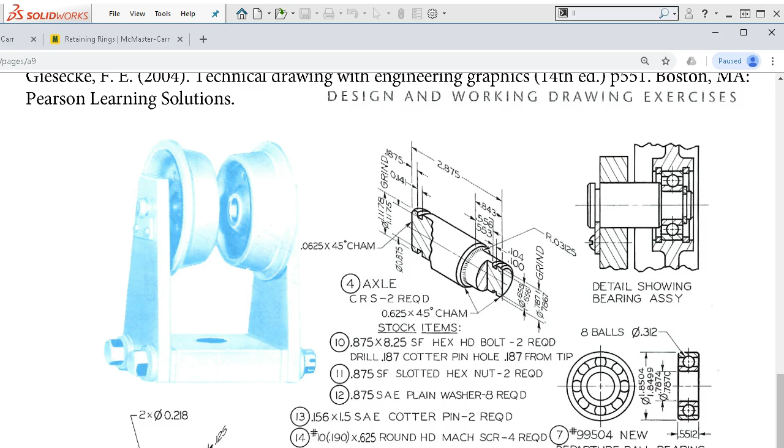Okay, 1353, the trolley, has a couple of purchase components that we'll need to download. I'm going to go into my Windows Explorer, and we have Assignment 9. I'm going to go ahead with a new folder, Assignment 9, and this will be 1353. So we have a folder to save the parts in when we identify them.

Alright, so one of the things we'll need to do is see if these numbers correspond to a metric bearing. Right now, the number 99504 New Departure ball bearing doesn't add up to anything or show anything, so we'll go do a search for ball bearings.

Looking down through the list, we have to decide, well, it's a trolley, it might have some wear. Probably don't want an open bearing. Shielded wouldn't be bad. And then sealed is probably one of the better.

So if we scroll down through here, I'm still kind of looking for that 99. Nice thing about sealed, they're pre-lubricated. They pretty much don't require any maintenance.

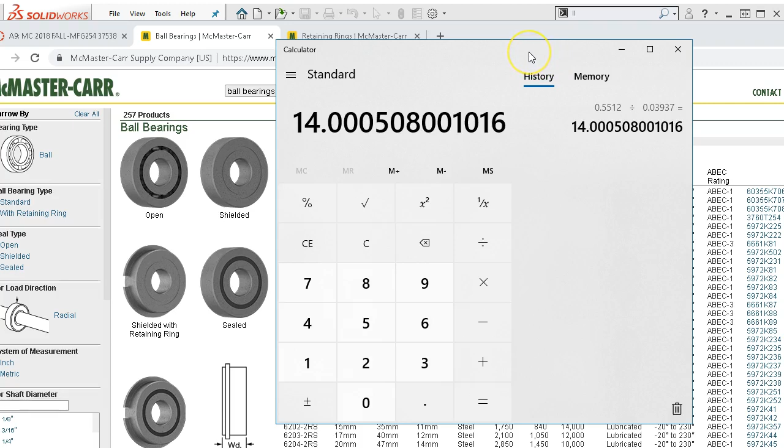So fly that out of the way. We go and we find a 14 millimeter. So 35 millimeters and 62. And I'm going to click on the part number, go to its detail.

So that doesn't bode well. So there is a 47 millimeter, 14 millimeter width. Alright, so it went down too far, so that's looking better.

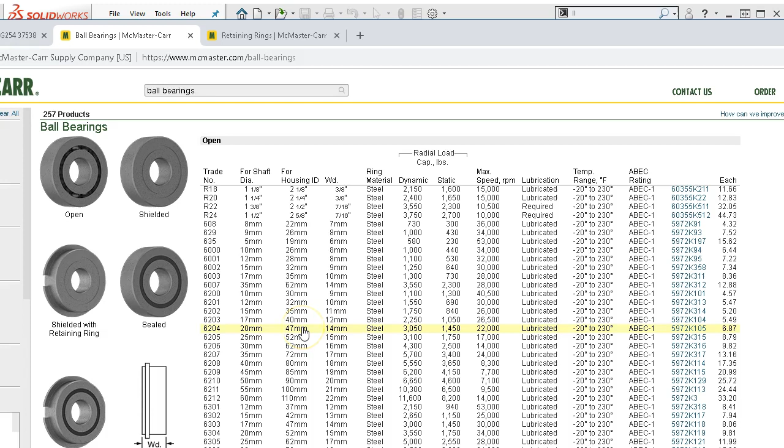And then the shaft diameter of 787 to 74. Alright, so 787.

If we need to update the shaft to 20 millimeters, then we'll see if it fits within the tolerance zone, the 787. Well, we got a little bit of running fit there. Alright, so I'm going to fly that out of the way. Well, let's see, so that takes care of the bearing. So 47 millimeters, 20 millimeter shaft.

The file product detail, and then we're going to save this. And was that a sealed? Seal type was open. And before I get away from that one, let's see if there's also 47, okay, for shielded, and 47 millimeter by 14 millimeter.

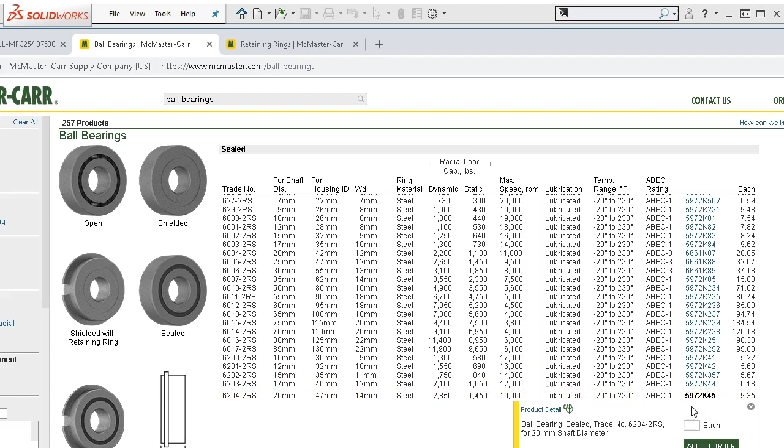Alright, and then we will save that file. That's going to go to my downloads. And then I'm going to jump back over to the Windows Explorer and just put that in my project folder. This was something that we're going to use regularly or had for sizing. Then I might create a folder in the design library for these components.

Right, so the other item that we need then is a couple of axle, we have snap rings. And so I do want to check the design library. O-rings, power transmission, internal.

Snap rings that they're showing don't have the E-clips, the retaining, the holes to help put them in and take them back out. So I think we'll find something comparable and then go in for the fit.

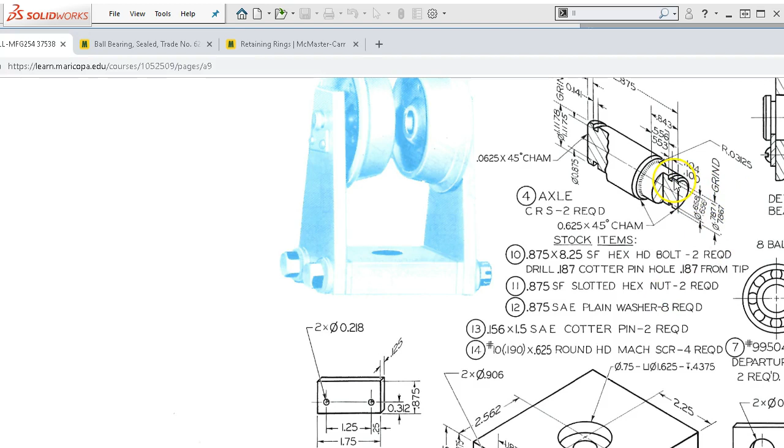Alright, so since we have a basic ANSI, the 656 would probably be clearance for, well, let's double check, because that one's, if that's an external, and depends on which part of the shaft. So, alright, so that one is on the external.

And that goes through. Oh, went too far, so, okay, so on the bearing, and that comes out.

Alright, and the side view, we're looking at the stack up, so it's retaining through the shaft. The shaft comes up to bearing on the shoulder. Oh, and then the outer.

So where is the second retaining ring? So, oh, they're on the internal for the to hold the bearing, and then that holds it up against the face. And then the keeper plate slides up into the slot. Alright, kind of getting that.

Alright, and then the side 7/8, and they're wanting to put a cotter pin. So I'm not sure where that one's going. Maybe through the base. Said to ignore items 7 through 14 on the list. We're going to read through those real quick.

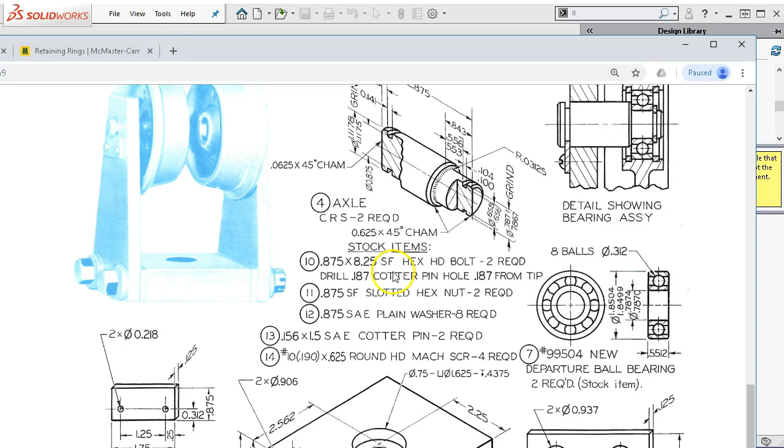That's looking doable. So we have a couple of internal snap rings, and then one external. Let's go ahead and identify the hardware. I don't think I need to download the snap rings.

So we're going to start with the axle, and we'll get this going. The axle is pretty straightforward - a couple of grooves, says that we'll be doing a revolve. The back side of the bearing is going to contact that radius, so I don't know if they're looking to seat that or give it some clearance.

So front plane, sketch. We'll go with our centerline, infinite length, horizontal infinite length. Then L on the keyboard puts me back into the line. I was going to look at the chamfer on the outside. We'll just do this first part to get it established. I don't really have to put in the chamfer.

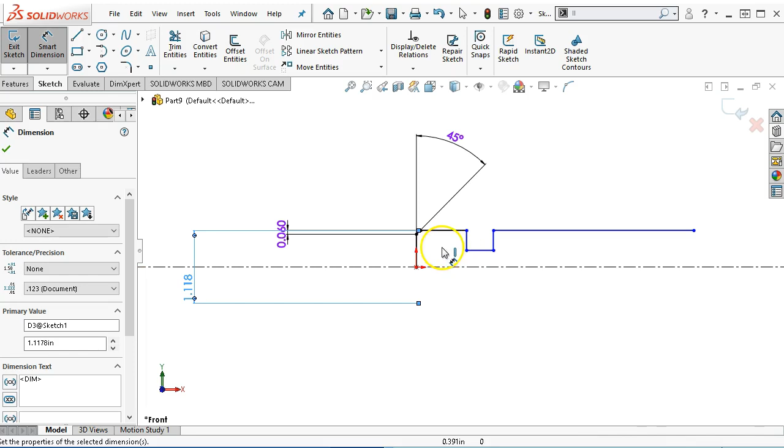That should be right at 30 millimeters if we change this over to metric. Maybe that'll be the task for this, since the geometry and the parts are basically duplicates, one of the things we may go back and do is optimize for metric since these are pretty close to our numbers anyway, and see what we get.

So the inside is 0.875, and we have 0.141 - cancel, because I did not get out of the diametral. So escape, 141. From the edge, ignoring the chamfer, 0.875.

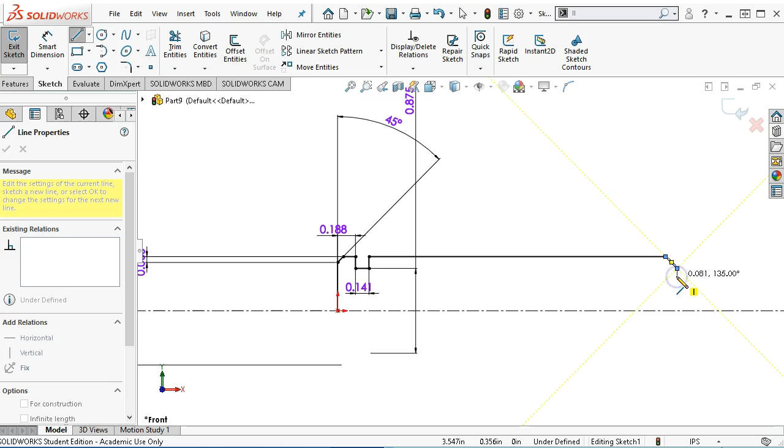We'll set - oh, not equal. Control Z, we want collinear. There we go. And another chamfer - since I'm including them in the sketches, we'll go ahead with that. Don't know if there's going to be a little bit of a flat there or not. We'll see if that plays out.

Alright, so 0.06. I'm not sure what that grabbed, might have been the midpoint. Alright, so 45 degrees. L on the keyboard to get back in line. I think I'll put that radius in last.

Alright, the other snap ring groove or retaining ring groove, and then another chamfer, and then back. In the previous example I didn't close it off, and it asked me, when I completed the revolve, if I wanted to close it off. So we just make it a habit, it's a little easier. 2.875 - okay, so not entirely unexpected that it would do that.

So we can pull these back in pieces and kind of rearrange as we go, as long as it doesn't get too crazy. Based on the way that moved, we're going to do select, control select, and collinear. The geometry then, the 656 to 658.

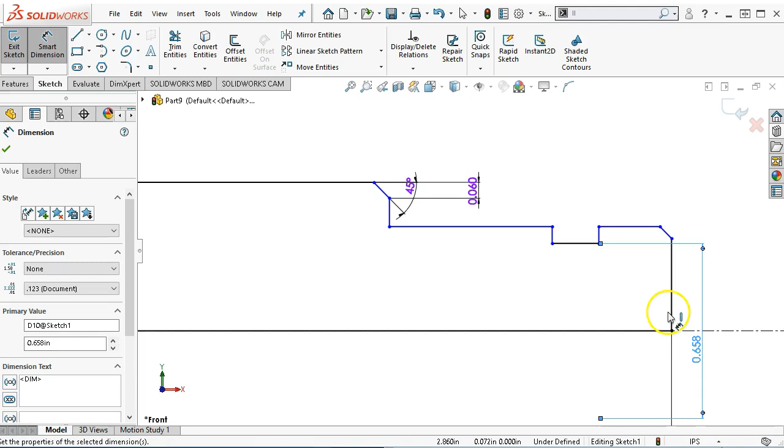So 0.658, and then the outside was 7871, 0.7871. Alright, same thing - oh, we're on the centerline, so go ahead and bring this out. 0.06. And either picked up a parallel or a perpendicular to something.

Alright, and then the maximum material 100 to 104, so we'll go with the 0.1. And then the distance is 0.556 to 553, so 0.556.

Alright, so let's see what's able to move and why. Overall, then the dimension that I'm missing is the 0.843. Okay, so that gets it fully defined. So the radius of 0.03, and features revolve.

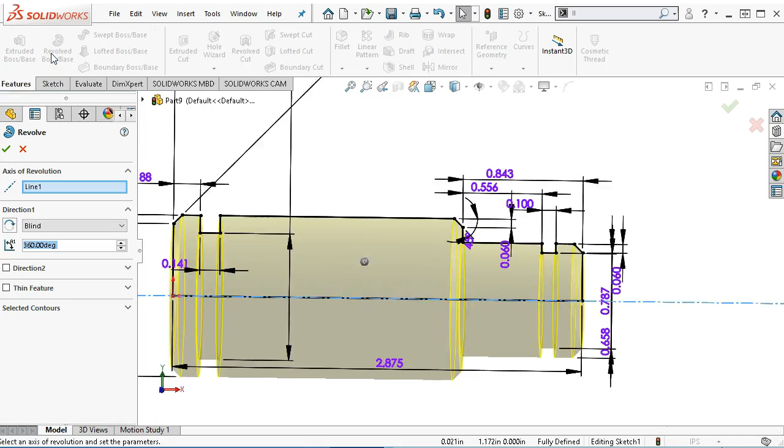Alright, so coming back into the edge, internal face, we'll go for 0.03, and then we're ready to save. Alright, so this is item 4, the axle.

Alright, the keeper should be fairly straightforward - 1.75, 1.25, which is clearance for the 1032s. So that'll be a sketch on the front plane. We want to take advantage of that symmetry, so just a rectangle out in space, hold down the control button, we'll go to the midpoint, width is 1.75.

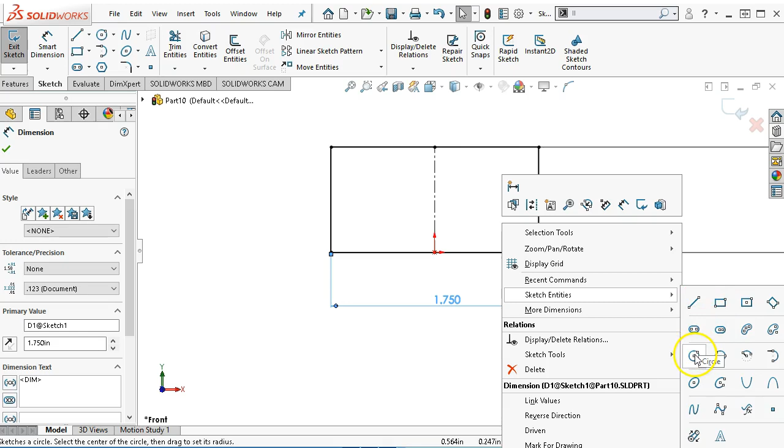Since there isn't any additional geometry, we'll do this in one sketch. If we go line and use it for construction, then we can use the symmetry. Let's see, sketch tools - selection, nope, sketch entities. Alright, so we can find a circle down in there - I don't often use that one, just wanted to point it out. And we're going to mirror those over.

And 5/16 from the edge, 312. And 0.25, or 1.25 on center, and 7/32. Okay, so 1.25, and we got an extra couple of digits in there, so we'll just overwrite 218, and then our thickness, 1/8 of an inch. And features extrude, 0.125. So this is item 6, the keeper plate.

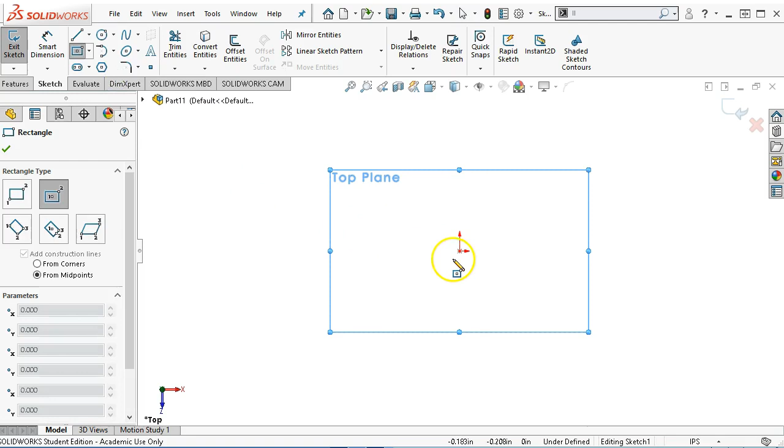Part edge. Let's go into the top plane and kind of looking towards the assembly. I would really like this to be at the center. See if it'll let me change it. Oh yeah, let me change it, but I lost my point, so we'll drag that back.

Corners and midpoints, kind of a personal preference. So we'll go 4.5 and then 5.125. And then I'll extrude that out to a distance of 1.75.

Okay, and then the through holes, we maybe could change those over to threaded holes, and it wouldn't necessarily have to go all the way through the 5.125. So in that case, if there's a possibility, we're going to do the hole wizard.

906 should be just above 7/8. So all drill sizes, let's show the decimal values. And then 906, 29/32nds. And then the end condition is up to next.

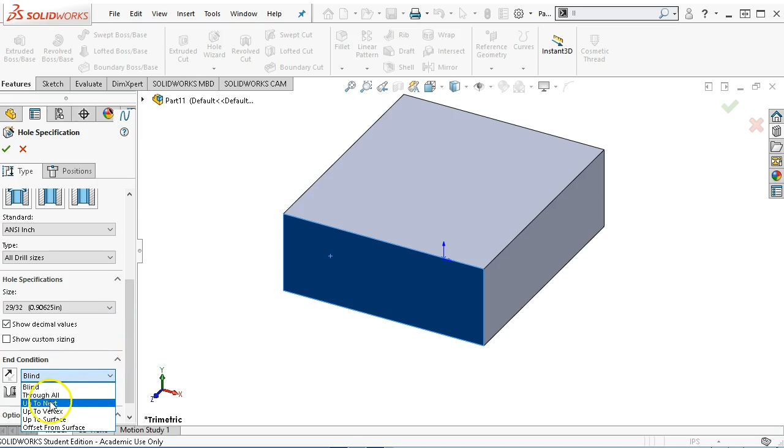Go back to the positions. And I want to use the symmetry, so we'll go with line, and for construction, select Control Select for the mirror of the entities.

And we're given a positional between the two, 2375 to 2372. So in this case, we have a 3/1000 variation, and I want to say that for position, we should be considering a mean value, so 735, and then we'll see how it plays out with our tolerance.

Alright, so this is going to be a limit dimension plus or minus 1.5 thou. And then the decimals, we'll go ahead and put it at 4 decimal places.

So I was looking for 372, and still had one too many zeros. So tab, let it update. Alright, so 372, 375, mean value for the position.

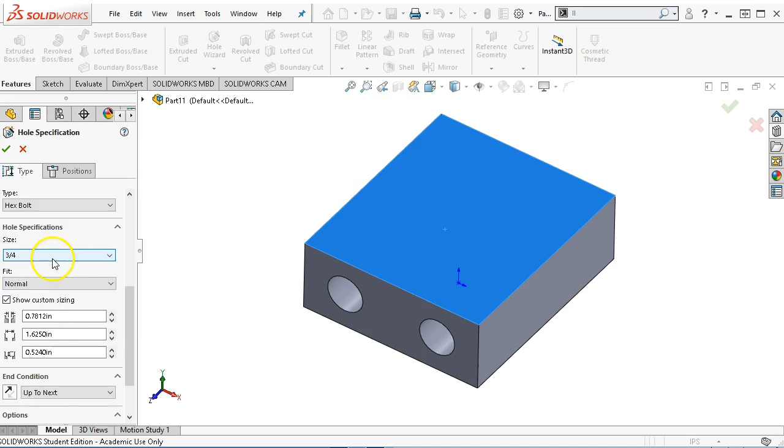And let's see what it looks like normal, show the custom sizing. So we're at 781. It makes me think it's going to be a 5/8 11 again, so let's go down to a 5/8. And then we're at 0.65 and loose 0.6719.

Depth-wise, we're pretty darn close. Alright, so in this case, we're going to make an adjustment. Just be aware that when you override these values,

that you're responsible for making sure that the fastener is up to the standard. All right, and then position is at the center of the block, conveniently enough. Place it and accept it.

All right, so ready to save, and then this was item 3, the crosshead.

All right. Looking at item 5, the adjusting shim. Very similar to the keeper plate. So rather than redraw all of that geometry, I'm going to open up the keeper plate.

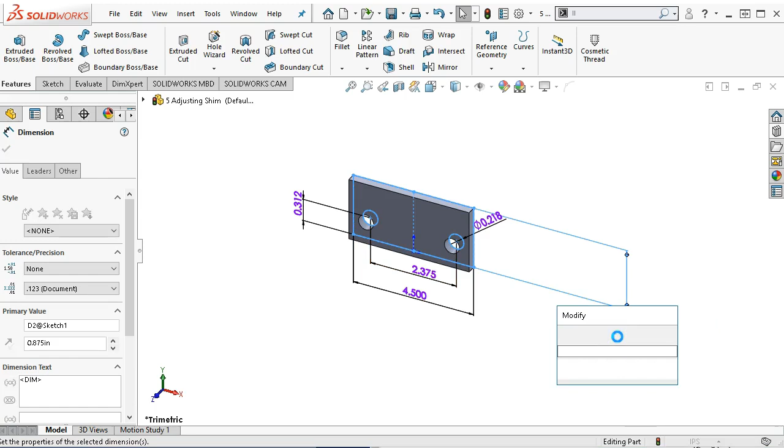Alright, so in this case, I'm going to go ahead and put in the 0.875 rather than tying it to the center line. Hole size is 15/16, 0.937. And then we go to rebuild.

That makes this the larger plate. And then it is also 125. So we go ahead and save it. And then we have that piece in the mix.

Alright, so the tumble to remove burrs, hot rolled steel, so a 1018 10 series. And then tumble to remove burrs. Well, we'll just remove the burrs.

Okay, so then close that one up. We're going to the side plate then. And then that one is still open, so file new. Part inch. And we'll sketch on the front plane.

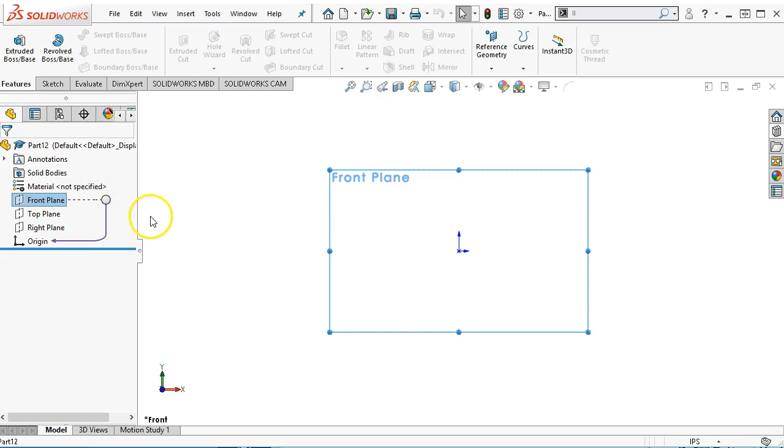And we still have symmetry. So pretty much the same as what we built. So I'm thinking with a corner rectangle, since the base kind of has that initial step up, we'll do the midpoint. It's 4.5 wide. The first step is 1.875.

And to switch that to construction geometry, so when it comes up, I'm going to go to center line from the pull down, or do line and change it, so that becomes vertical. The overall height then is

9.25. And the width at the top, 1.875.

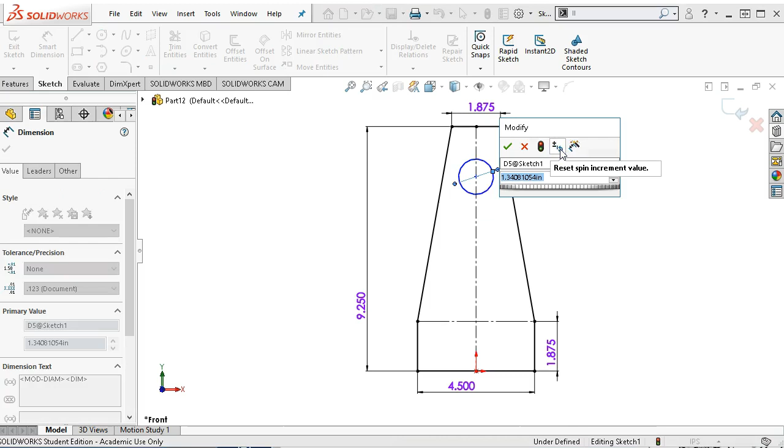Alright, and then we have the holes. So again, maximum material condition is 1.116.

And from the base, now we need the other 2 holes. So that's going to be 1 inch. Did not click to complete.

Alright, so we will set those to the mirror. And those were, well, they weren't called out 3 times. Oh, there we go. 2 times 0.875.

And they are 1 inch from the base. So, considering the others were 875, that gives us a little bit of a gap.

And then the distance is going to be the same as the block, and since that was the tight tolerance, 2.3735.

Bilateral dimension, 0.0015. Boy, I sure like that third zero. Okay, half a thou, no.

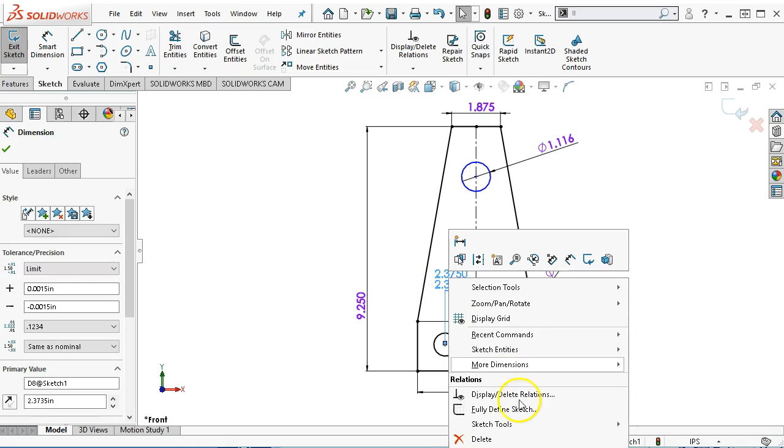And I don't think I did this one on the other one. We can mark for drawing. That one in place. And then in relation, between the holes is 7 inches.

Okay, so we have the 10-32s for the plate. We're going to extrude this out, and it has a depth of 0.75.

And then S key, hole wizard, tapped hole. Reset the custom sizing to what we're doing currently. And then we're going to go to a number 10-32, 10-24.

And up to next. So positions. So we'll stay with the center line. I would just as soon use the mirror and the symmetry than do the stack up of dimensions where there's a possibility of making a mistake. So 1.25.

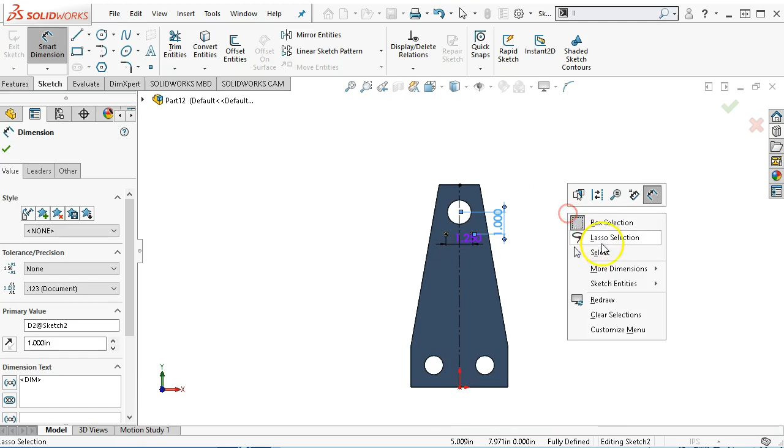And then from the hole center to the point, 1 inch. And we'll go ahead and accept. And then we're going to do save.

Is number 2, the side plate. Alright. So then that's going to leave the trolley wheel. Just a quick double check of my numbers.

So not geometry. Alright, so 1/2 inch bore, 3 holes equally spaced.

Alright, and then we're looking at this profile, so that's going to have some complexity. We're not concerned with the holes, but the retaining rings. And we've already sketched in for those, so I think I'm going to try those with the retaining ring tool, just to illustrate that.

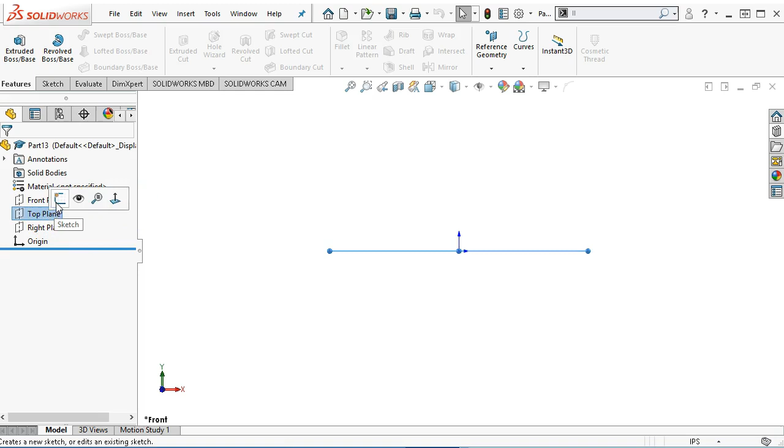So I'll fly out the number 1 trolley wheel. All right. And then on the top plane, looking at that profile, go with the center line, vertical, infinite length, onto the origin.

Don't really care which side of the hub is going to be for the geometry, so I'll start sketching this out, apply that back in. So I've got kind of this segment.

We're going to do the retaining rings with the groove tool. So that comes out. Saw that there was, okay, the profile, 375 on the height.

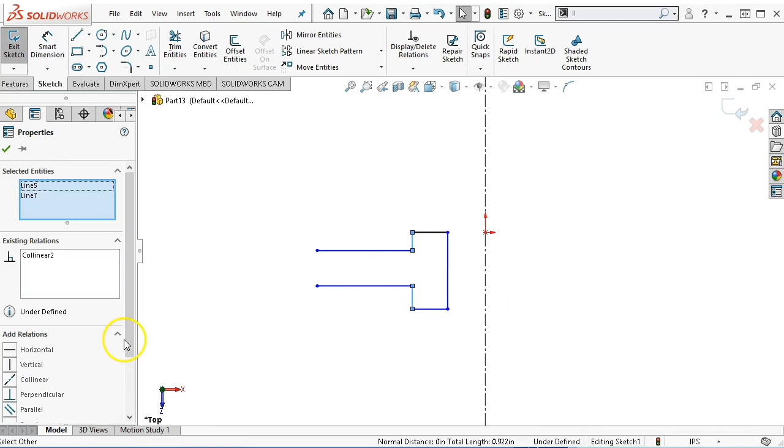So we can make those two items collinear and then come back and make them equal. And we'll go 0.375 and 0.375.

Okay, for the diameter, all right, maximum material condition for our first number, we have the 1.8504 and the 1.8498. So 1.8498. Smaller number is my maximum material condition.

2.5 to the hub, that's the one I'm looking for. So the outside, 2.5. All right, and then we're going to need some more geometry.

So the wheel falling away, we're going to put the radiuses in at the last. And that doesn't look too bad. We'll be able to go all the way around.

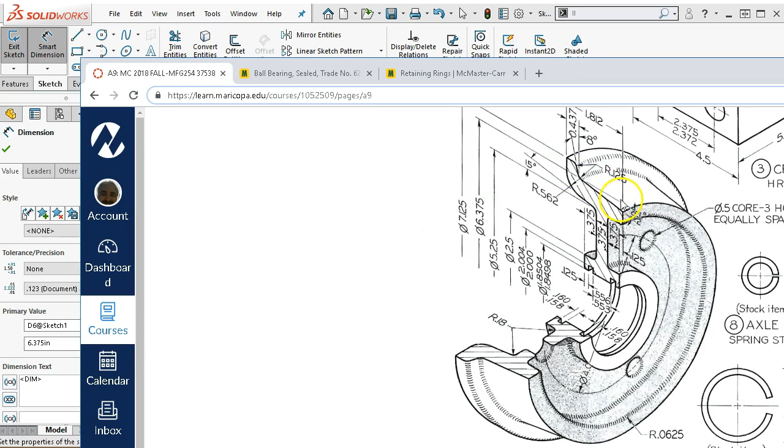Alright, those should be on the same plane, and then we can start working with some collinear, and then we can start working with the heights.

Alright, so the overall height, 1.812. So 1 13/16.

Alright, so it inverted itself a little bit, we're going to pull that back. Let's see what we have for a step. If that comes up even on the face, no, it's telling me that we have about 1/8 of an inch difference.

Okay, so let's fly, so let's make sure where I saw that. So the outside edge, 1/8 of an inch, and then that goes to the hub.

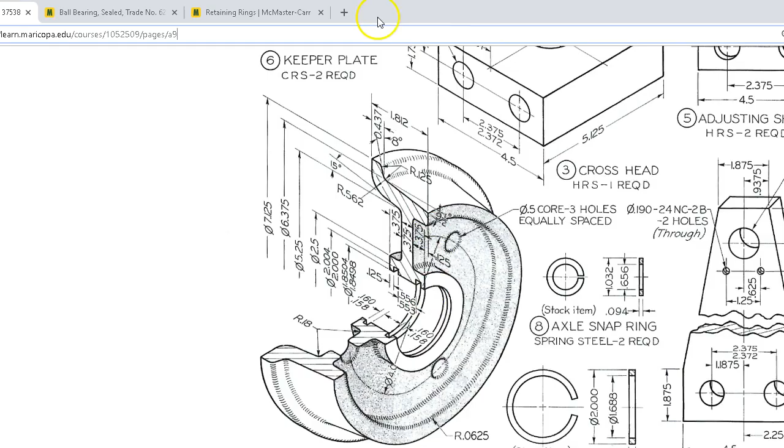Okay, so kind of a small amount, 125. All right, and then the outside step, 0.437, 7/16.

All right, and then there's a radius, 0.562, so let's go ahead and put it in as a fillet on the interior edge. All right, so the rest are going to be pretty much consistent.

So they gave it a 15 degree. Let's see where that is coming off of. So if that comes off tangent to the arc, well then I'm going to need the arc. And looks like it's coming off of that tangency point.

Well, let's see what that does to the dimension. Alright, so let's get out of the fillet, and then I'm going to take the vertical off, because it has that parallel dimension, I'm not going to be able to use that.

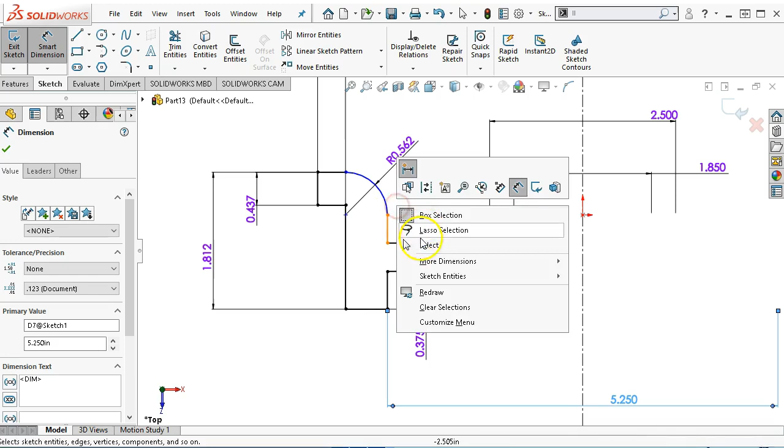And those can't be collinear. Alright, so let's get the dimension back in before we start making adjustments for that 15 degree. Alright, so starting point.

And let's see, that interior radius was 0.18. Okay. And we're not given the dimension to the center of the radius.

So the 15 just kind of back a little bit. And then since that dimension pulls, thinking it's going to be at the radius, so we'll make it coincident. And then 15 degrees off of my vertical, so might as well go back to the center line.

Alright, so that kind of jumped out there a little bit, but that gives me the geometry. Let's see, with the wheels, sometimes we're looking at the crown. It keeps expanding out on me, so there we go.

No crown, 9.5 degrees coming back to the face. All right, so that's interesting. So 6.375, and that looks like at the bottom of the radius. So those were 1.25s.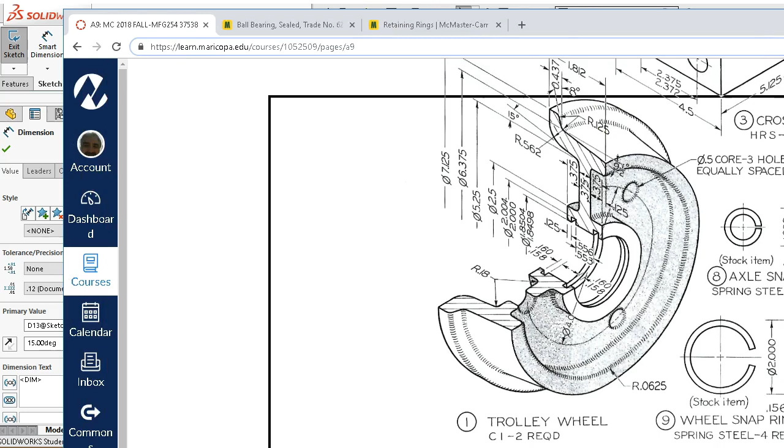All right, so that one we take the vertical off of, and there again the dimension is driving it, so we have to take that one off. All right, I'm going to put the fillet in at 0.125. So I'm not exactly fond of the way that these are dimensioned, but can't do a whole lot about it.

All right, so 9.5 degrees from. Need to pull that just a little bit off so we get the angle started. Now we'll be able to pick that outside edge and the line, and that'll give us the 9.5 degrees.

All right, so near as I can tell, 6.375 is out here, and it's at the bottom of the radius, and then the radius blends up and in. So that being the case, move that out of the way, find our dimension.

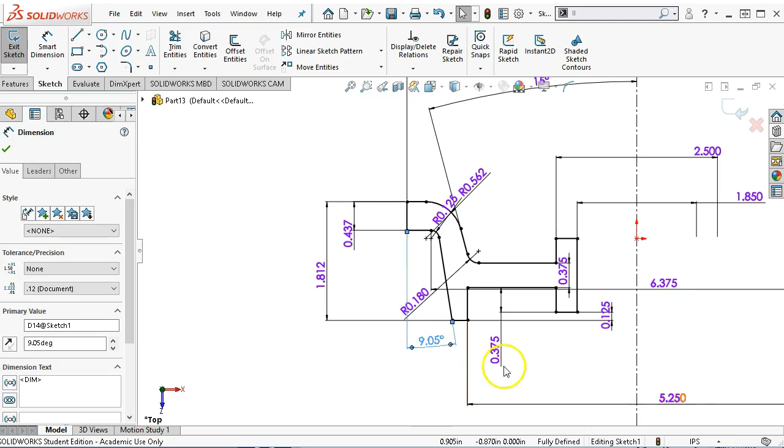And bring it in. Oh, and I put a 0.5, I guess so, 9.5. Got an extra 0 in there. Alright, so that's quite a bit different.

It's kind of hard to tell what's going on in with that angle. Oh, and then they got me for another 8 degrees coming off of that angle. So back to that point for the 0.437. Wow.

So that being the case, take the 0.437 out. We're going to take the horizontal off. Right, so identifying these geometries. Right, so that's letting it go.

The 0.437 is to the bottom of the radius. Again, that's from the visual.

And then we have the non-parallel lines, so we can go to 8 degrees. And all of a sudden this became a little more complicated.

Alright, so we'll fly this in one more time and see if I missed any more dimensions. So overall, 437 intersecting at the radius, and then 9.5 degrees, 8 degrees off of the back.

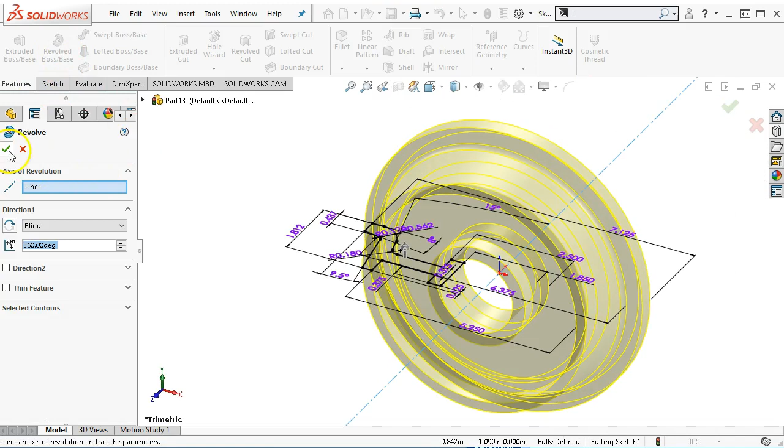Alright, so interesting trolley wheel, let's go ahead and revolve. Alright, so it ended up not exactly like the drawing, but that's okay, we have good geometry, I'm not going to worry about changing it.

All right, so opening up a sketch on the inside face. Let's go ahead and generate the base circle. So 4-inch base circle for construction.

Pick a quadrant and dimension of 0.5. I'm going to set that one to vertical. No, I should have put the 4-inch in.

Okay, so now we can go into our circular pattern, and we're going to have 3.

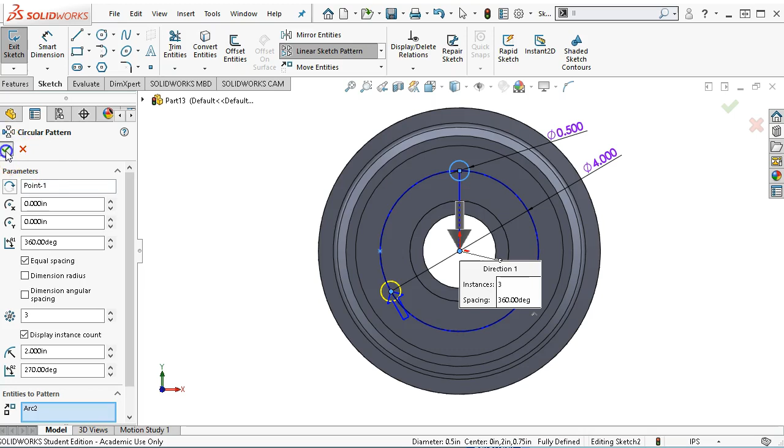Alright, so once again, I'm looking for the point. Nope, it did something there. I know it's there. Alright, so if this was a Hole Wizard item, that would be counted in the instances. Since I was able to drag it back to the origin and get it to go fully defined, I'm inclined to leave it.

And we'll extrude cut and tell it to go up to next. Alright, so we have enough into this one. Well, we have way more than enough into this one to save it. And we'll set the trolley wheel.

Alright, so I'm not ready for the rest of the fillets just yet. So we have the inside geometry. And if we go to, let's see, right-clicking and going to the SolidWorks add-ins.

I want to say that I saw it, but I'm not sure where. So I may have to go back to the standby. So there is the SolidWorks toolbox, and that is all of the fasteners. There's also under tools.

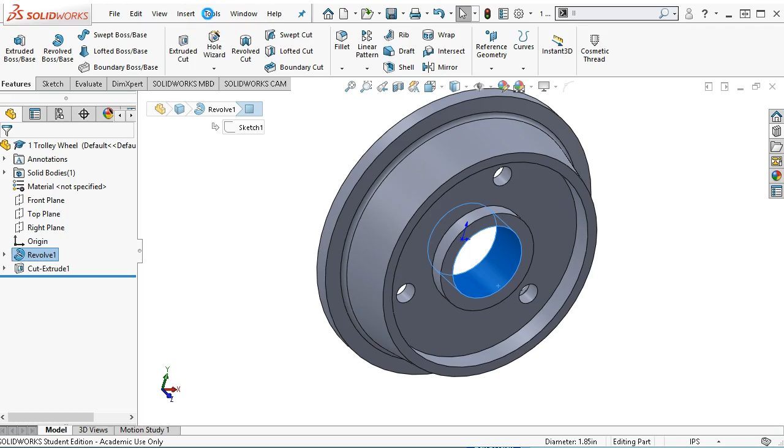Okay, if it's not crashing on me right now. Come on, you can do it. Okay, it was just waiting for me to pause the video.

So, tools, toolbox, where we went before. Now you have the structural steels, which are the I-beams, the grooves, the cams, beam calculator, and bearing calculator for life expectancy of the bearing. So groove - we're going to pick up for the retaining ring.

And we'll give it a chance to catch up. We'll let it pause while it's catching up. Okay, so O-ring grooves and retaining ring grooves.

So this is an ANSI inch. It is an internal ring. And actually, seeing how we're pretty close to the metric sizes, and we're going to switch to metric anyway, I'm going to do a basic internal. And then we're looking for that.

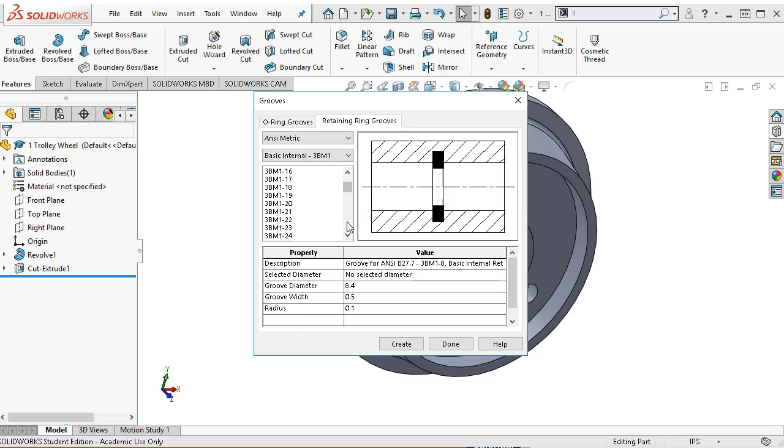What did we end up with? 2-inch. So actually it probably should be pretty close to a 50 millimeter. Alright, so we'll see what that gives me. The groove diameter, selected diameter.

Alright, so I have the inside face selected. I had the inside face selected. And it jumped over to 47 as a default. So 49.8, that looks pretty close. And we'll go ahead and create it. And we can always make adjustments to the sketch once we determine how close we are.

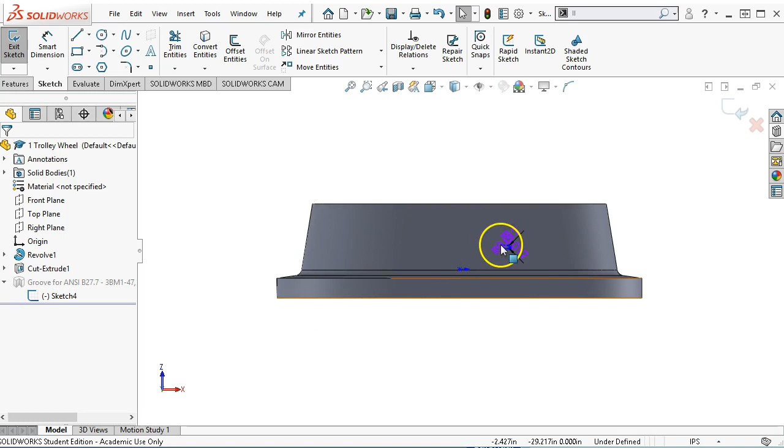So done. And then the groove, expand it out. We're going to edit the sketch. Alright, so we still need center line. For this, we're not going to need it to be infinite length, so we just need to do the revolve cut.

Alright, so the width that we're given is 0.125. And that was quite a bit smaller. Alright, so we're probably going to have to dissolve this sketch because I don't know that those numbers are going to line up.

So pretty close. So maximum material would be the 2-inch. The depth is going to be to the wall. Right, so I can just drag that over.

And we didn't get - let's make sure we get some verticals in there. Vertical, horizontal, horizontal. Alright.

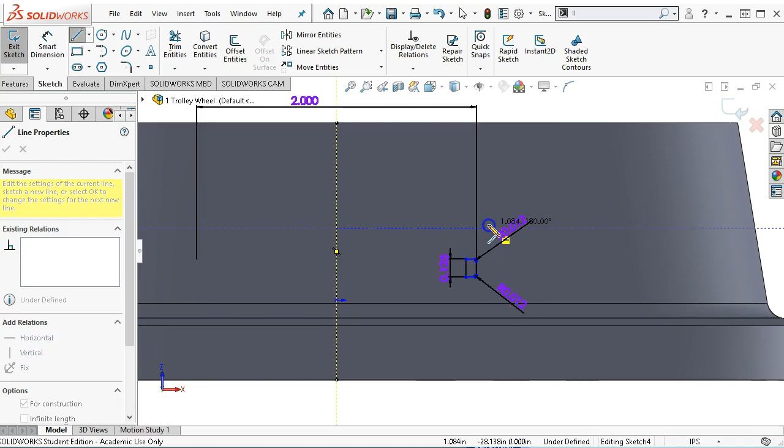So I'm going to go ahead with the second center line. Well, let's put it back in shaded with edges. And we'll just come out some distance. I need to grab my geometry and then control select. I'm going to mirror that over.

Alright, so that's going to give me the depths. Now, once again, we're on the interior, so this was 553 to 556. That falls into the category of the positional again.

Our bearing is 551, so that's a consideration - we have a couple of thousandths of clearance for the bearing to sit in there. Alright, so I'm just kind of cleaning up on that, and then we have an 1/8 inch off the wall, so we'll jump back into the hidden lines removed.

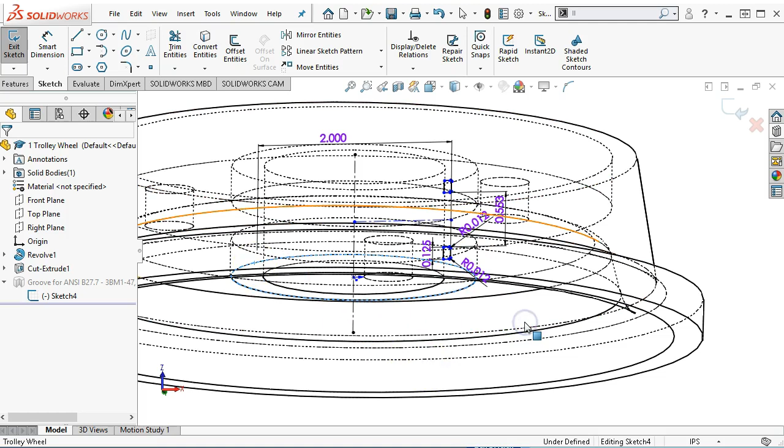And then the lower edge, okay, back to - okay, control 5 didn't work, control 6. Alright, so just kind of verifying that on the step we're up, over, and back. And we'll zoom up on that.

So 0.125. What was the groove size? So, nope, groove size actually was a little bit bigger, 160 to 158. So, oops, we can catch up to that, 158. And then our dimension is still 553.

Alright, so that looks pretty good. We can go ahead and accept. And that gives us the groove. But I'm not sure that that specification is what we need it to be. Alright, so it's still showing me an underdefined condition.

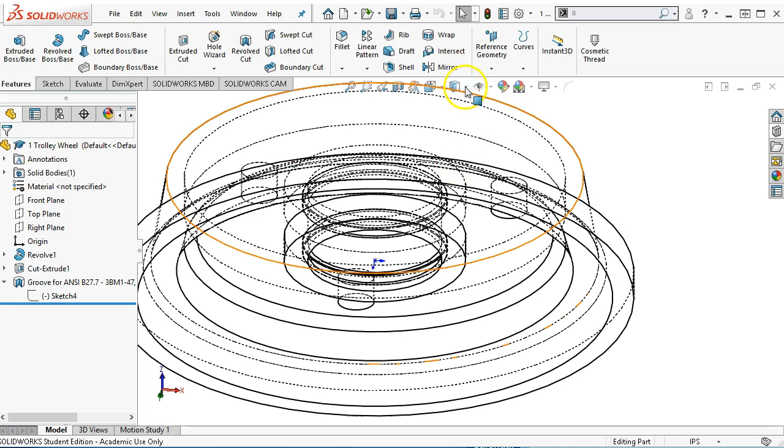I'm getting all kinds of fun stuff there with the view. Alright, make sure I know what I'm picking, get back into the shaded with edges. Alright, so that all looks pretty good. So if I right click - just wanted to check on the groove description.

All right, so let's pick that up. The 069, so that would be about 1.75 on the groove width in millimeters. So we have it in there. And then let's go ahead and save. And our radiuses are 1/8 of an inch on the outside.

Looks like a sharp edge on the corner. The interiors, don't really see anything. Well, we have the 0.18, so that would probably be typical. And 0.0625 on the outside. So we got a little bit of everything there.

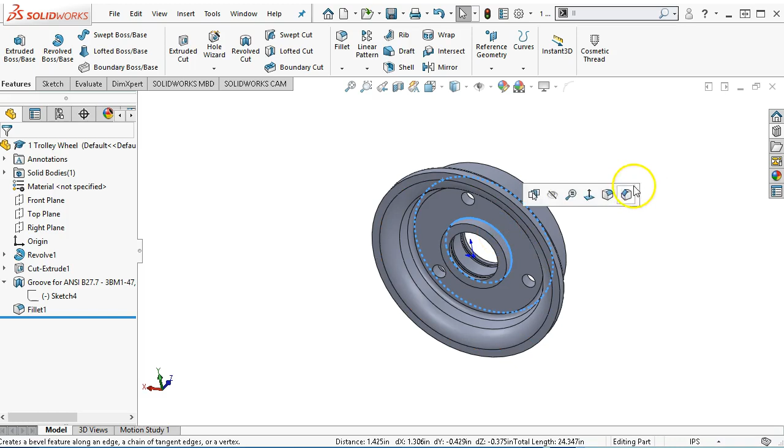So let's start with 0.125 and accept it. And then the outside of the wheel is the sharp. Okay, and we already built the 0.18 into the inside to get the angles.

Okay, so that's looking pretty good. Let's see, it looks like we missed one there. So that was the inside, the outside. Alright, and then we'll go one more. 0.06.

Alright, so let's take a look at what it does in section. And would really rather have the top plane. Well, let's go to the top plane. And rotate over and see if we can get pretty close and compare geometry.

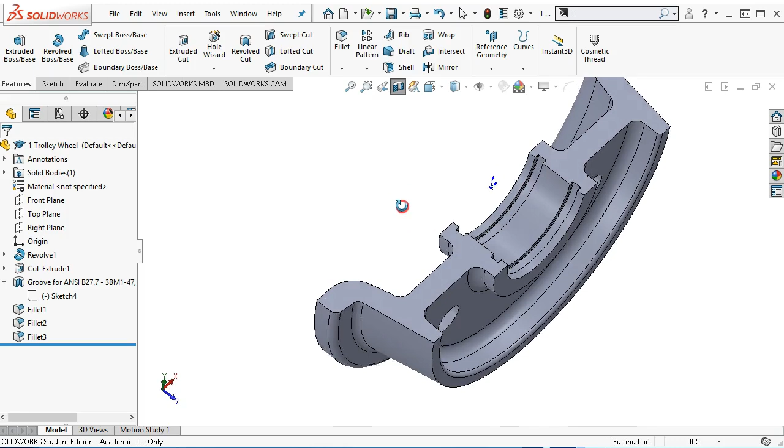Alright, so my half-inch core hole doesn't intersect through that plane, but the rest of the geometry looks pretty close. Not seeing anything terribly missing, so we will call that one good.

Alright, so clicking on that. Let's go back into sketch 4 just real quick since it's still got the minus sign. Would like to see. Put a center line up here for me. And not sure why that groove or why that origin is so far out.

I ended up drawing one, and I don't really want to delete that one. Well, let's see what happens if I delete it. Alright, so everything was tied back to the original, so, okay. Maybe that wasn't a good thing. Alright, so let's see if we can undo it.

Alright, so their center line geometry is the one they want to keep. So I'm just going to connect it. And I saw that briefly flash up. Alright, so it's still underdefined.

And make sure it goes vertical. And now we have a fully defined sketch. So most of the time the center lines won't affect it, but in this case it did. Alright, so we'll save. Good.

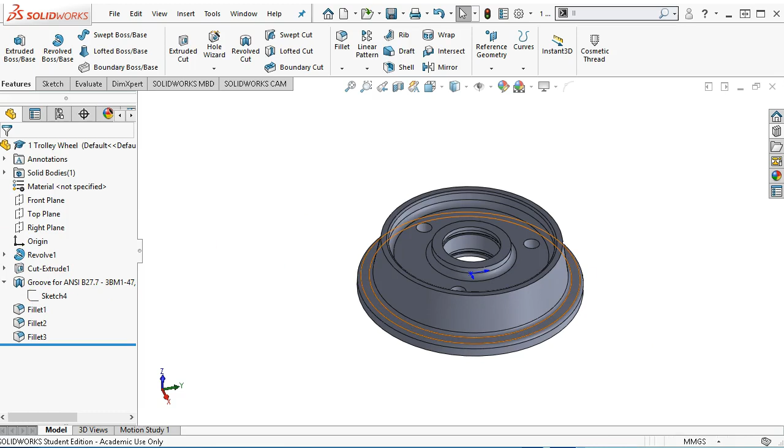Alright, so here's where it gets interesting. We drew in inches. We made the one adjustment for the ring. And if I switch over to millimeters, grams, and seconds, then when we go back into that sketch, we're going to see everything in millimeters.

All right, so making the conversion, jumping over to millimeters, we're going to lose a little bit and gain a little bit on some of the numbers. All right, the ones that I don't want to mess with, this internal, right, because that was the 447, and then the 63.5, we can leave those.

All right, staying with the 3/8. Well, that could go up to, if we thin out the web, no, I think we just need to leave those two alone. And then I don't want to shift the position there. I think we're okay. So we're just going to make a few decisions on the overall.

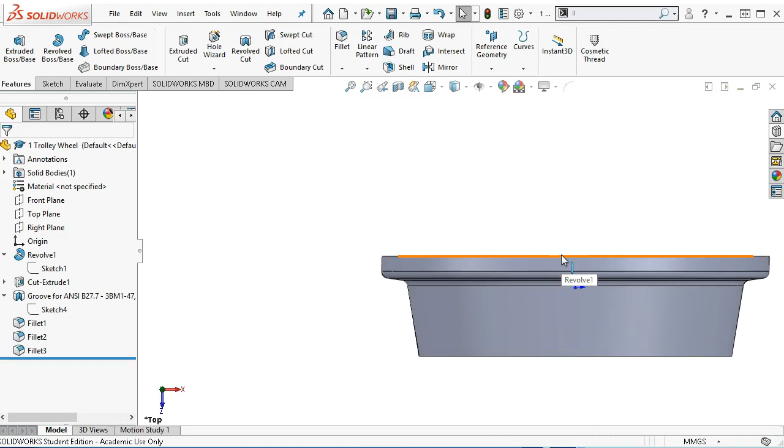So 181. And that's the basic. When you see the instructions to convert to metric, that's pretty much all we're trying to do is what makes sense - if I see 4 decimal places or 3 decimal places on a metric number, do I really need those? So let's go ahead and save.

I think that's the components. So we'll set for the new assembly. I'm going to browse to the, item 3 will be the first item in. And again, accepting it because it is in position. I don't have to flip the orientation, just going to the check mark puts it origin to origin.

Advantages and disadvantages of our inch to metric conversion, and I only did one part. We can certainly go through the rest.

And the question is, do I want to bring in individual components or have the mirror, since this is going to be a pretty decent sized stack up. So for this one, we'll do a mirror, and then we'll see if there's any issues with setting it up that way.

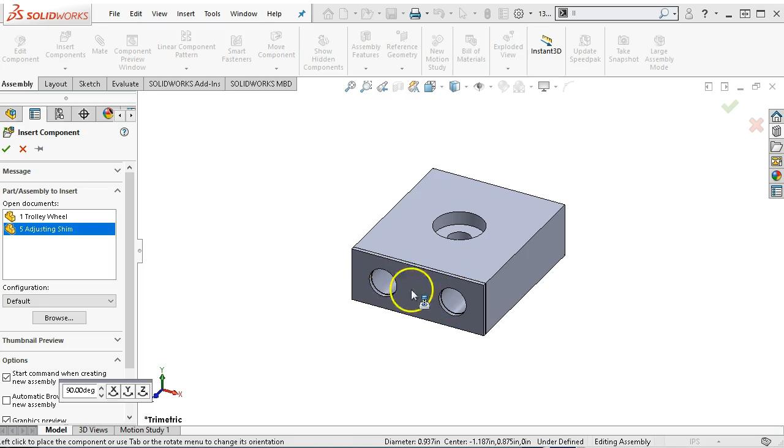Since it's open, I will insert components, and I'll grab the adjusting shim, and now whatever cylinder that I hover over, it's going to try and make it concentric. Right, it also made the edge coincident. Right, so that little bit of mate reference is going to let me be a little more efficient dragging it in and getting it set up. And then we can go concentric.

All right, so apparently on my numbers, add this mate and break. And then there are misaligned options, which it's interesting that came up. So if we use the misalignment options, it's going to allow it to stay in place even though we're probably not more than a half thou off. But notice that the concentric picks up that extra symbol.

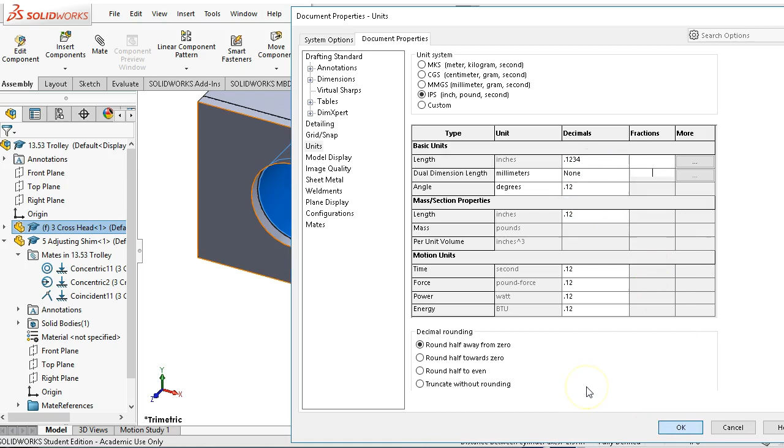Alright, so since those weren't as critical, it was position, and the hole is enough larger that positionally it will float into place. So that's where the misalignment's coming in. Alright, so if I'd gone to 2.375, then the plates, the outside piece, yeah, really it's the side plate that has the same dimension. So positionally 906. So I don't think really the 3/1000ths.

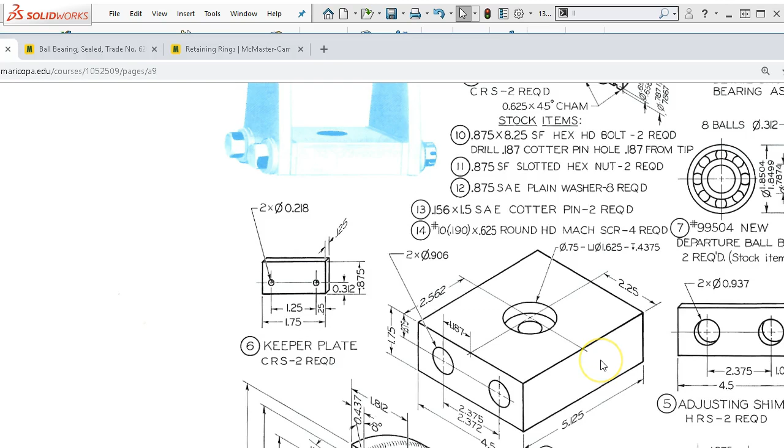That holds it a little tighter than a nominal dimension, but I think probably just leaving it to the 2.375 will line all those up, because an 875 hex head bolt, so a 7/8 bolt going through there, is going to be fairly tight through the outside, pretty well loose on the adjusting shim, and then a little tighter but fairly loose on the through. So that stack up is probably something that needs to be re-examined.

But we'll leave it off alignment or misaligned, and then we're going to insert for the side plate.

All right, and didn't set a mate reference for this, so we're going to bring it up coincident. And then because these numbers, move it a little bit closer, these numbers should line up with the tolerances.

Then I'll have concentric. And one of the reasons that I do concentric to concentric is exactly for that reason. If there is a misalignment, if there's something that doesn't stack up, then it's going to bark at it. And I want to say it was 2017 when they added the misalignment, allowing it to go ahead without having to go back and correct it.

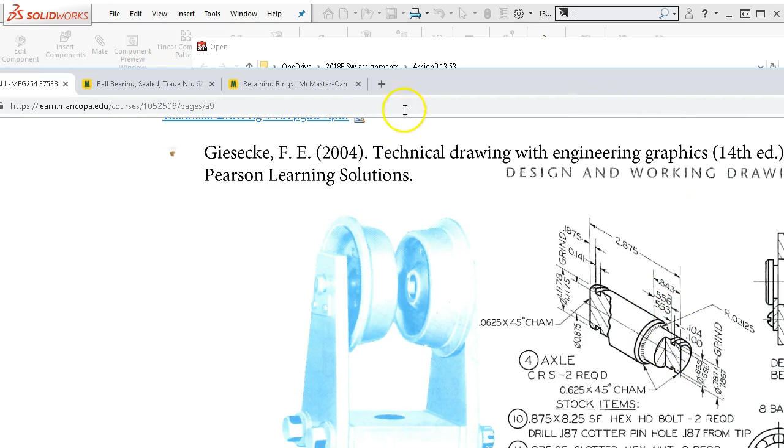Alright, so insert. I'm going to bring in our first item. Was the item for the axle. And then we can go back and look at the keeper plate.

Alright, so same thing, we'll line that up. Go in concentric.

Alright, in the face. Alright, and I also realize that I'm cruising through these mates fairly quick. At this point, you should be getting used to the mates and the coincidence. And I want you to be able to see something that is closer to real time. Right? That you can expect that once we get into the rhythm and the workflow of these projects, that it will go a little quicker.

All right, so I'm staying in insert component. We'll bring in the keeper plate. All right, same thing. I didn't set a mate reference. If I had, it would be even a little faster, so coincident. Since I can see this geometry, we're going to go in. I'm still trying to go face to face, so get used to zooming in. And concentric.

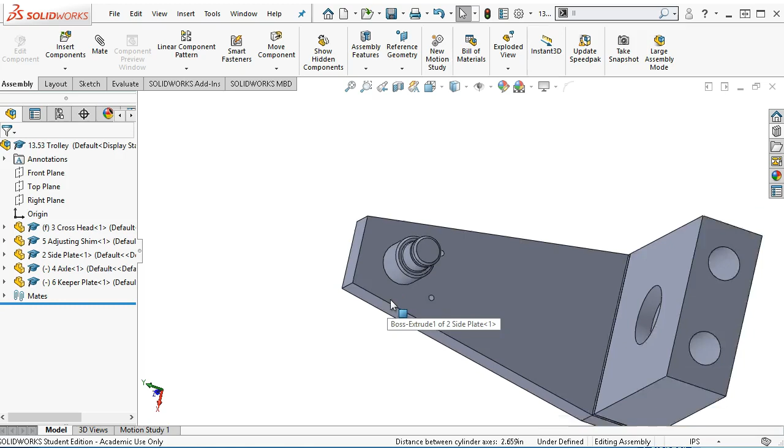Alright, and then if there's a misalignment, I want to be able to pick it up, so concentric. Also, positionally, for this to act as the keeper, there should be a little bit of clearance. Right now it's showing interference. Maybe. That would be an interesting one to look at, to see if it is actually touching or if there's enough positional that can sit a little lower and we can still get the screws in.

All right, we're ready for the bearing. All right, I'm going to browse over to and pick up the bearing. One of the things with McMaster-Carr, very often they come in with sketches showing. So more than I needed.

All right, so we'll go with the shaft, and then to the, well, I say that I would like to see where it lines up with the edge, and then sitting on that radius, if that radius is a clearance. So yeah, kind of. Seems like there'd be just a little bit of float in there.

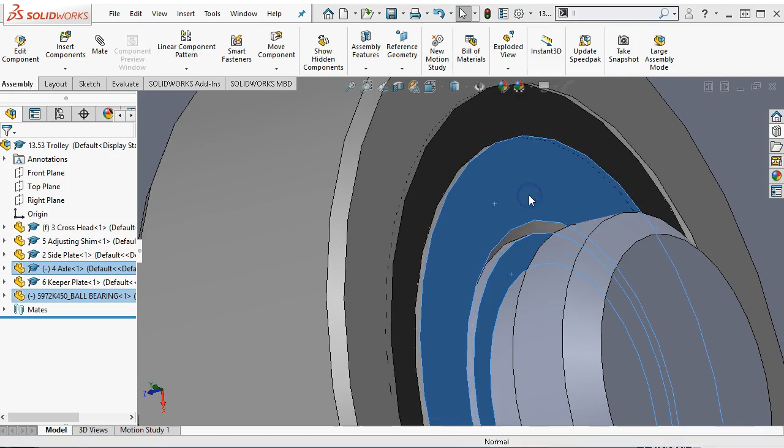So I'm going to bring it up to the edge. Alright, so face-to-face coincident. And that looks like it's in contact. So I don't know about that 32nd radius that we left in the axle.

It seems like that's going to bind up, or it's going to offset it enough that it's going to be sitting on the retaining ring. Alright, so we'll figure those out. You may want to pull that back a little bit once I get the ring in.

Alright, and then insert component. We're going to bring in the trolley wheel. It needs to flip around, so a couple of rotations on the Y. If you're not, we haven't really needed it in this one, but the interface allows for that rotation.

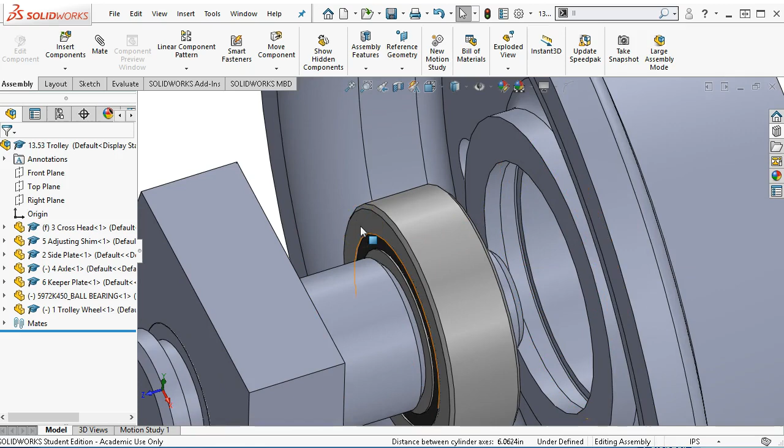Alright, so those two faces are going to be concentric. Thinking that face, and we'll rotate around and I'll find the inside wheel face. And those will be coincident.

So even though that was supposed to be 14, oh, I picked the wrong one. Let's Control Z, and Control Z again. Alright, so that puts it back out here to where that face and that face are coincident. Oh, I got rid of my concentricity with all those undos.

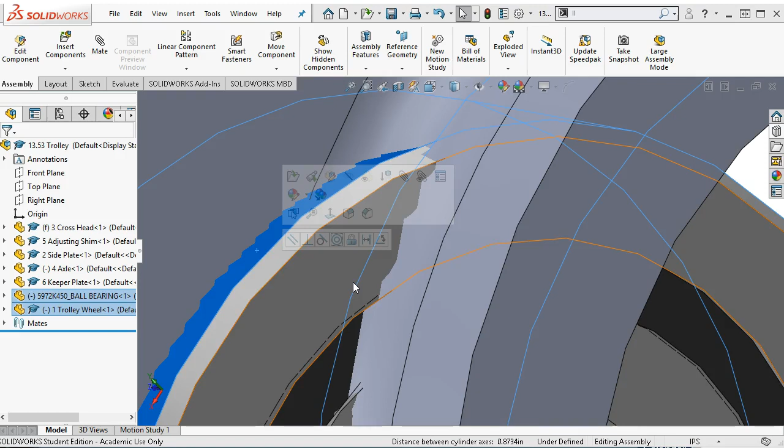Alright, didn't take something there, so let's go check the mates and make sure. Nope, not yet. Alright, so got a few lines for it to calculate, a few circles. Making sure the face is selected. I tried to pick a little too close, so here we have the concentricity.

Alright, and then as far as rotation, I think it's okay that that's able to rotate. So let's take a look at the hardware that we're going to need. We'll do the retaining rings first.

So we're going to have an external and then two internal. So going into the design library. Oh, I got the file explorer. Let's go to the design library. Okay, so previously we had navigated over to the toolbox, ANSI inch, found the retaining rings.

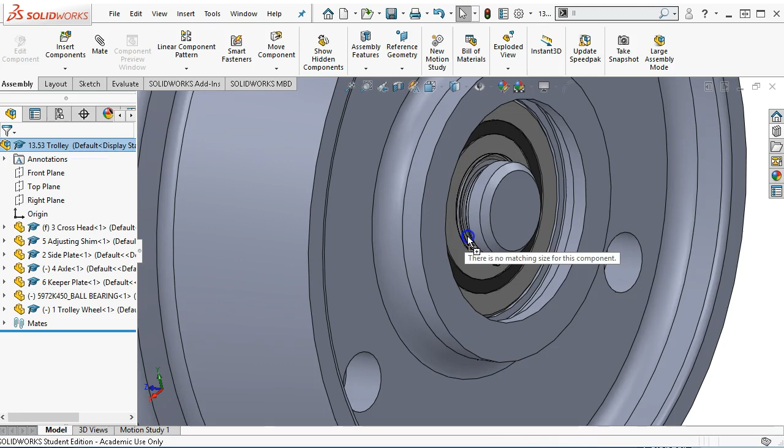We need an external ring first. And so do we want the clip? Let's see, so a C type, and then the E type, or the, would that be just the one? I kind of prefer the ones with the holes in it anyway, so I'm going to place it. Let's see, it got a little bit bigger there. I think that one looks pretty good.

And the shaft diameter picked up 21.4 millimeters. So even though we're in inch pounds seconds, did I pull a metric clip? Groove diameter. Alright, well we can always adjust it later. That does look a little on the large size though. And no, I don't, 0.658, that's not even,

Okay, so 16.7. So right clicking on that, I can edit the toolbox component. Oh, well, we got all of them then. Let's see, so would think that, no, that looks like it's going to be a little too tight, the 11/16. Groove diameter 646 and reference 046.

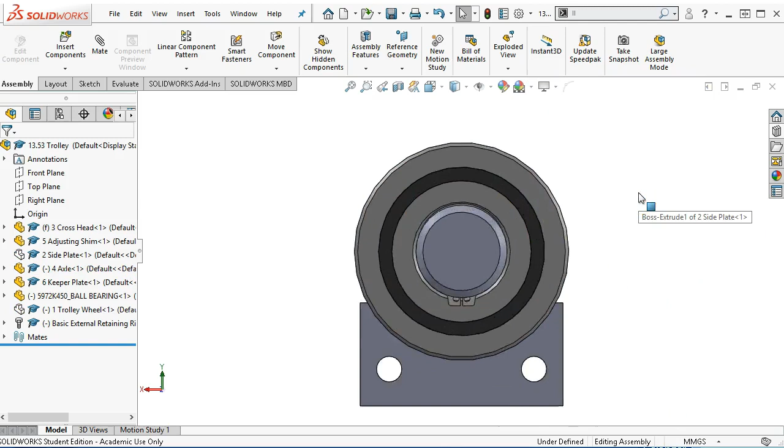Alright, so let's do a Control 8 on the end face. You can hide a bunch of those that we don't need. So I'm just going to go through and tab, and that looks pretty good. So no, that's not quite it. And went right up against the edge. I think I need to reverse that geometry anyway.

Alright, so trying to rotate in to where I can get a measurement off of that edge. Alright, so 16.7. So if that's the case, then the 17 millimeters should work pretty good. So let's see, is that the OD? Yeah, no, the groove diameter.

Alright, where that one's still pretty big. 3/4 actually looks pretty good. So let's go ahead and accept that one, and we'll get a measurement off of the ring side. So if I pull it out a little bit, then the ID, yeah, I'm just going to switch back to inch, pounds, and seconds. Alright, so radius of 352, and we were 6.5, so no, those still don't quite add up.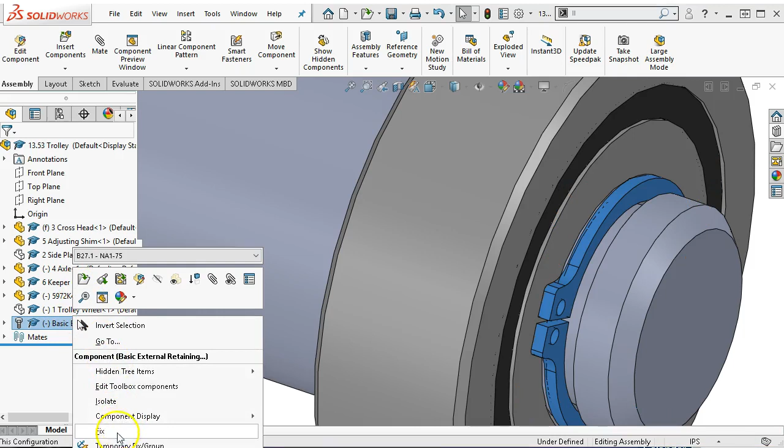Alright, so the toolbox group, I think the, come back to that, that diameter, the 658, 656. They held that pretty close on tolerance. 6.3, but that's going to be really embedded, so let's stay with 11/16 then.

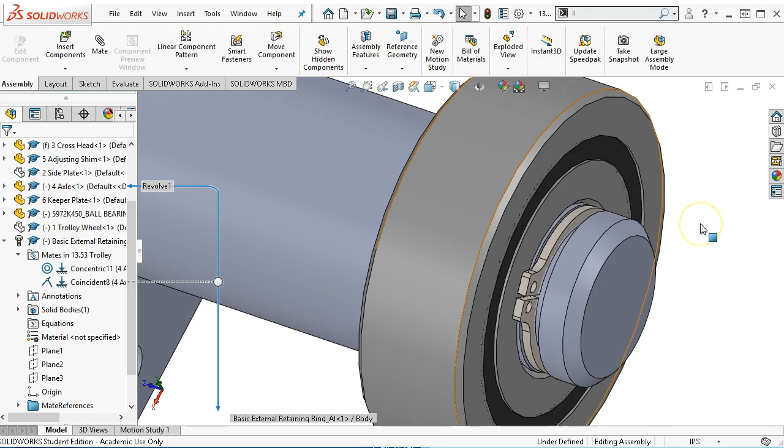Alright, so I want to make sure that that doesn't move. Let's check the mates. So we have concentric, and then coincident to the face. So yeah, I think that looks pretty good. Alright, and then I'm going to tab to hide the bearing. Alright, so just a little bit of geometry in that one, and we have enough float there to, so standard

E-ring, so that snap ring that they picked is probably a little on the large side. So we would want to come back and verify that dimension, and updating to what is available off the shelf. And then if I hold the Shift tab, then the external will come back. Going to switch, go back into the design library. And now we're going to go to internal.

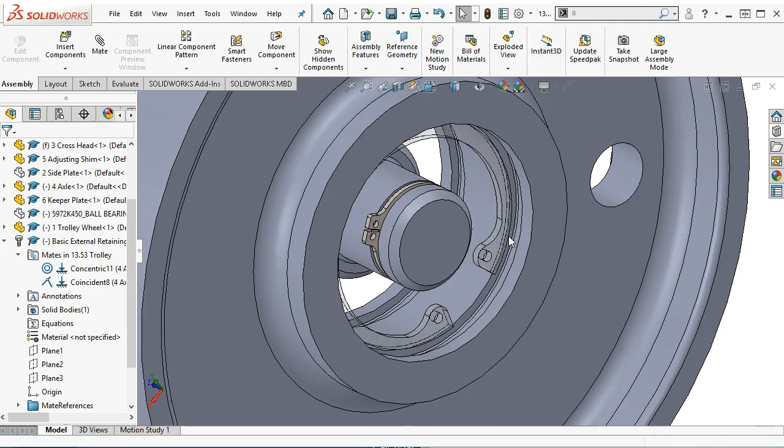And drag out. Okay, well, maybe we should do the nearest groove first. Alright, so 1 11/16. We know that was a 2-inch groove though, or a 2-inch OD.

So groove diameter 2.12, that's the compression size. 2.056, I think that would work a little bit better. We know we're going to have to compress it some. Alright, we'll go ahead with that one.

And then set it for, did it not apply the second one? It's still asking me for it. I think I see it, it just didn't line up to something, not sure what it lined up to. Okay, so we're going to find that diameter, go with that one, see if we can make those concentric.

Alright, so we got the retaining rings in there. I think that's probably a good fit. We'd go back to the manufacturer and see what the recommended diameters are and update that model to those values. Alright, so Shift tab.

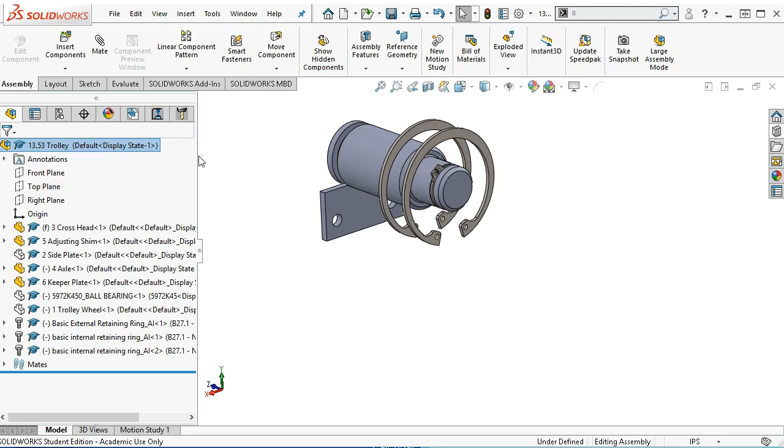Nope. So let's expand out. And where is my flyout? Okay, so there's the caret. We're going to show everything again.

Okay, so that looks pretty good on that end. Let's see, before I mirror this, we're going to have a stack up down here, but those are going to be pretty much the same.

So they're calling out for a round head machine screw. We're using hexes, so I don't know that it's going to be that big of a deal. We'll find the bolts and screws. Pick whatever you're familiar with. So there's a round head.

And we drag it out, and it finds the 1228 because that's the hole we lined up to. We're going to go to 1024. It has to go through the 1/8 inch plate. It doesn't really need to go all the way through the 3/4 inch plate though, so we can go up to 1/2 inch, I think that would be plenty.

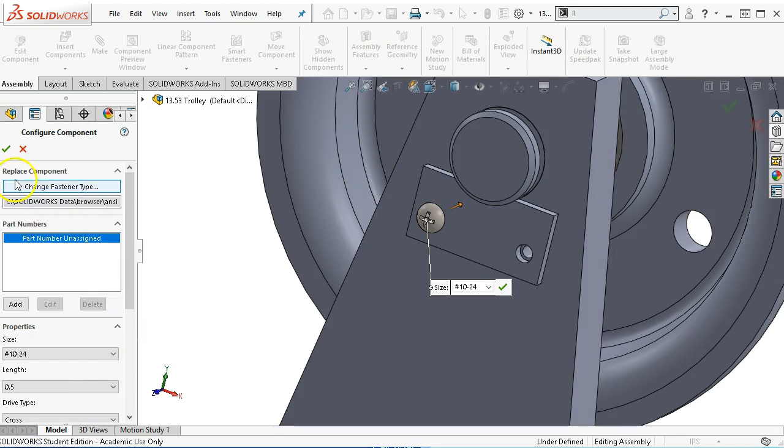We accept. It says we're ready to add the next screw, and then I can go ahead and accept it. Alright, at this point I'm going to save and rebuild the document.

Alright, so the 7/8 by 8 1/4 inch. Hopefully we can find one of those. Alright, so it is a hex, and the description, 875 by 825.

So now we're going to go to a hex head. I think it's, well, we'll start with a standard. It will probably end up being a heavy, maybe even a hex finish. See what size we can go up to. So 7/8 14, it would be a fine thread, probably the 7/8 9.

That looks okay. I would stay with the coarse because we're doing the castle nut. Oh, I guess it would help to make those just a little bit longer. Alright, since I missed, I'm going to highlight both of them, see if it'll adjust them at the same time. Length of 875 is not quite getting it there.

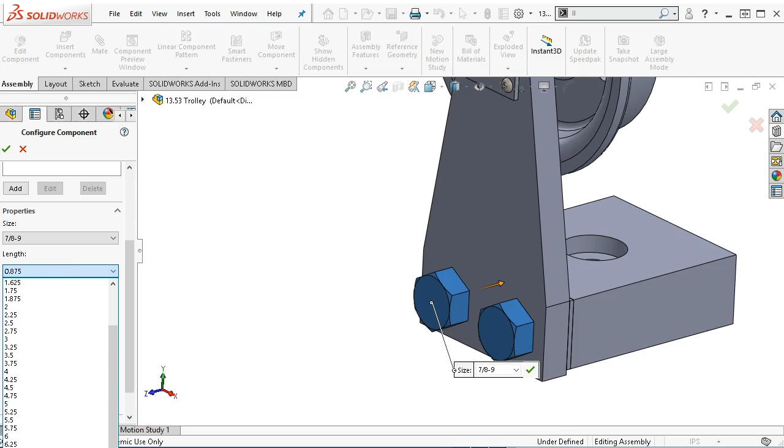So scrolling down, we have 8 and we have 8.5. Considering that we still have the other half to put in there, we're not too far off. Also, I did not include the washer in the stack up. Alright, so I'm going to back out of this.

Control Z, and we're going to take a look at Smart Fasteners. So Smart Fasteners is a way of doing stack ups. It has some advantages, but it also has traditionally come with a few headaches.

And we're going to go for those two. And it found a tapped, oh, that was the body. Alright, so we want to add to the feature. Alright, and the group. No, that wasn't the group that I wanted. Alright, so Smart Fasteners, yeah, don't show again.

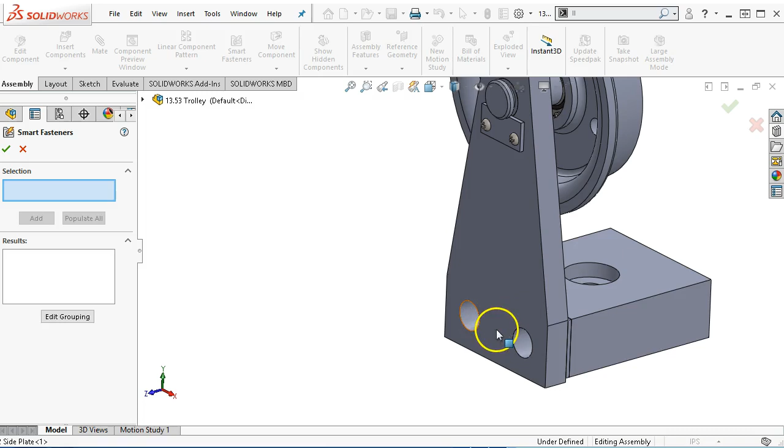Alright, so edit the grouping. Drag a series into another group to combine it, or drag holes from one series to a group to split the two.

Alright, it's supposed to be recognizing those. It's finding the 1024s, but, and usually populate all is about the easiest. So that should be the body name as the last feature added. Yeah, 1024.

Just going to trace that real quick. Yeah, so that's where the body name's coming from. Alright, so we'll go ahead and add it. And the group, now it's still finding that one, so that one's not the one that I want. Alright, so I hadn't added that one.

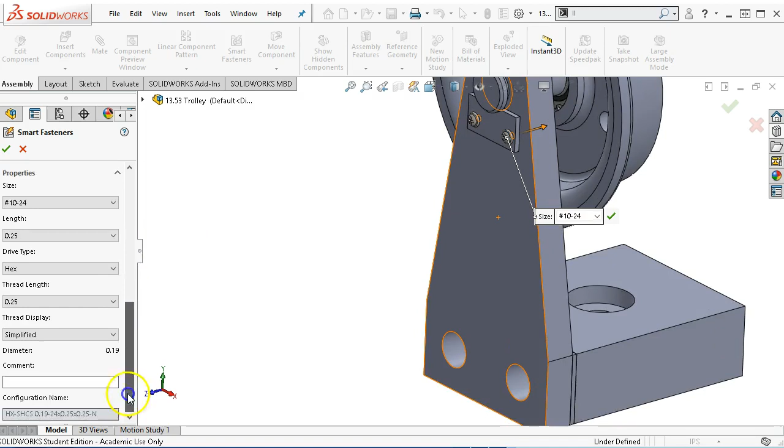Alright, it's not recognizing the larger hole, so maybe since it's not threaded, let's go with the block just to double check it before I go to the other route. And still thinks it's a really big socket head cap screw, so I found the 7/8 14, which is closer. That's still not quite what I'm going for. Alright, so.

Given that that stack up's not cooperating, let's go back and find the washer. We need to put one of those in first. Alright, so I kind of mentioned that the Smart Fastener can be a headache. If it populates all, it usually does a pretty good job. Since I already have a couple of the screws in there, that may be what's holding it up. So flat washer A, we'll just go with the preferred narrow.

Up to a 7/8, that one looks pretty good. Alright, and then actually I think we're at the point where to make this work I need to go ahead and mirror everything.

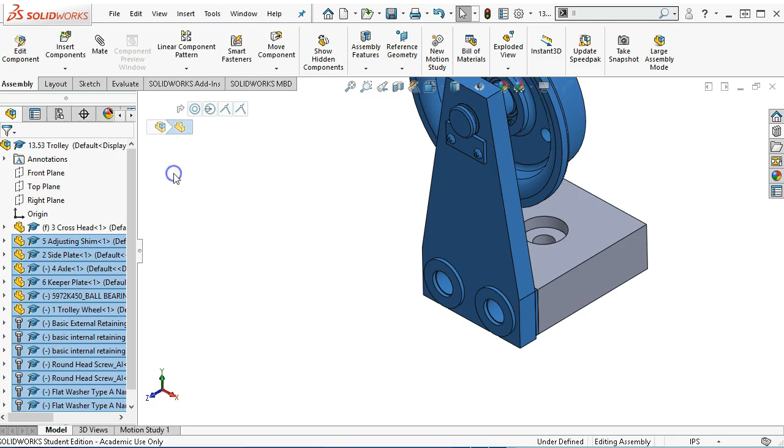So pretty much everything except for the crosshead we can select, and for the pattern then we're going to mirror those components. It needs a mirror plane, so that should be the front based on orientation.

Scroll down, pretty much has everything, and I did not do the second, so let's go to the next and view the orientation. Everything looks okay. There are sometimes other solutions.

Mirror type is bounding box, and then center of mass. Don't need an opposite hand version, it's symmetrical already. Alright, so I think we're okay with that.

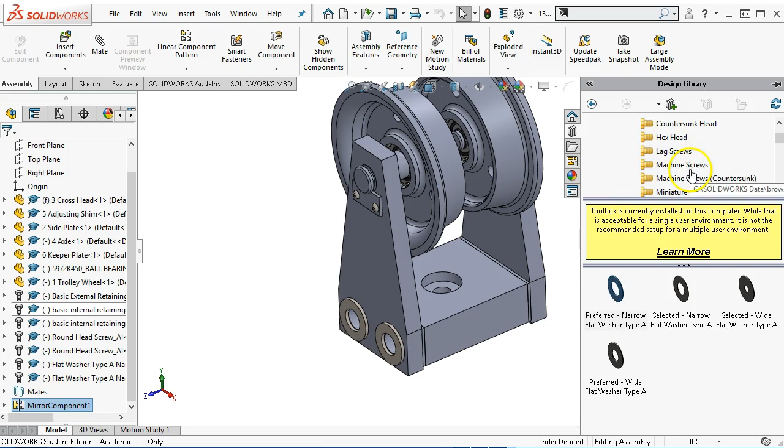Alright, and then now we can put in for the hex head. And that'll go to the washer. And it is a 7/8, we said 7/8 9. It can have a length of, we went to 8.5 inches.

So that's going to be a little bit long. Thread length of 1.5 is plenty, it doesn't need to be threaded all the way through. Go ahead and OK it, and then come back.

Alright, so we'll see if we can find a castle nut. So the hex slotted nuts, heavy hex slotted. So we're going to add it. It is a little bit long, but I would rather have that extra, but it is going to adjust the node of where we're going to put the keyway for the cotter pin.

And then I believe if we really wanted to take it that far, that there is a clevis pin, dowel pin, straight pin. I think we can find, actually could find a cotter pin and put that in.

All right, so to fully take this over to metric, we would go through each of the parts and update the values, making decisions on tolerances. The piece. At this point, I would like you to at least do the trolley.

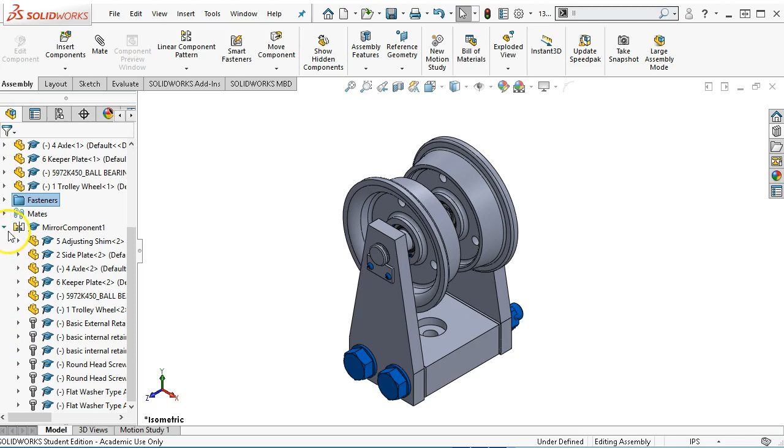For organization, then, I'm going to grab all of the fasteners, and we're going to add to a new folder, which is just off screen on the bottom. So fasteners, and technically it would be 2 because the mirror component pulls up the folders.

Alright, if we added material to each of these, so the crosshead block was hot rolled steel, so pretty much a 1018. Let's see what we have available.

So 1015 cold drawn, 1010. Alright, so we'll go with the 1010 as a hot rolled bar. The side plate also is hot rolled.

Let's see, well, if we go in order, the adjusting shim is going to stay with the hot rolled. So if I'm applying these a lot, we're going to need to add these to the favorites, since we're just going down through.

Okay, and then the axle. Axle was a cold rolled steel, so we can do that as 1020.

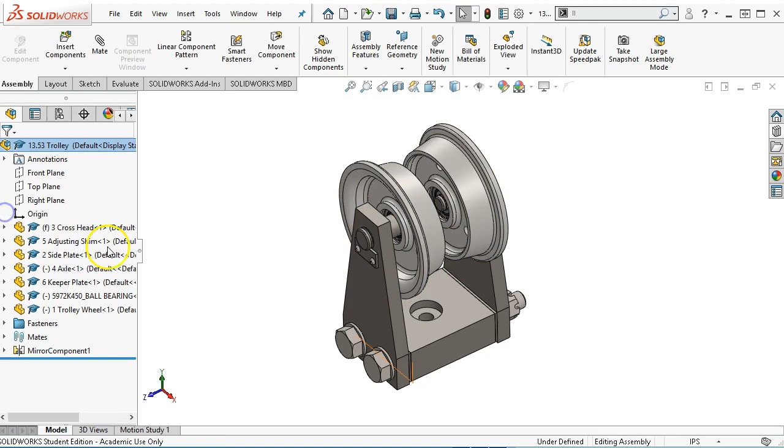Alright, the bolts, yeah, those are going to have a little mass to them. But let's go ahead and see what we get at this point. I'm going to go ahead and save, rebuild, and then under the evaluate, we'll go into mass properties.

And so this one is 37 pounds. So at least with the locating roller for previous 270, we're not quite as heavy as that one.

But there are certainly places that we could save some weight and probably not sacrifice too much on the structure. All right, so there's some other things that we could do to this.

This builds it out to a point that we can get some good information, go through, make some decisions on currently available materials and off-the-shelf products for the assembly. All right, we're going to call that one good.